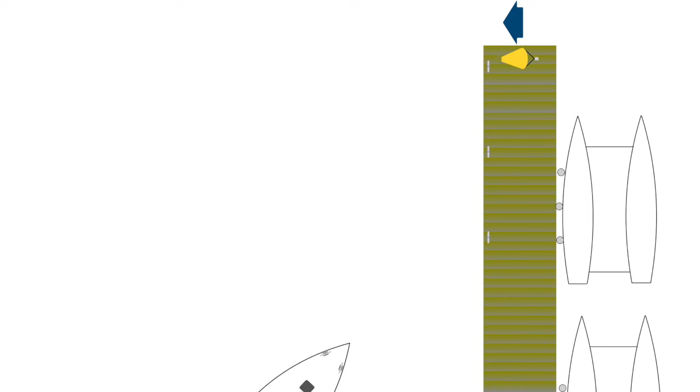So, the first rule of boating is that wind and tide are never helpful. Here you are coming ashore onto a pontoon where you have to moor with the wind and the tide pushing you off. Your approach is absolutely perfect, but if you don't do something quite quickly when you get there, then you know what's going to happen next.

What we need to do then is to make sure that we get a line or two ashore without delay once we're alongside the dock. The question is, which line is best? Some people like to get a bow line on first, and with a twin engine motorboat that can be arguable. Others prefer to get a stern line on first, and if you're single handing and don't want to leave the controls or the helm, that's also arguable.

What about the third option though, which is to rig a midline even if you're not planning to use it to moor later? A great cheat is to always imagine what's going to happen next if you fumble the next part of the job. So you can't get it in gear, your engine fails, or you fumble getting that other line on. What happens then? Well, let's look at what happens with the bow line.

The current and the wind push you off, and at very least you're going to struggle to get the other lines on, and if your cleats are further aft than I've drawn them here, you've also got a great risk of damaging the bow. With the stern line, things aren't much better. Again, you've got a risk of damage if the cleats aren't as close to the transom as I've drawn them here, and you'll certainly have more of a problem getting other lines ashore.

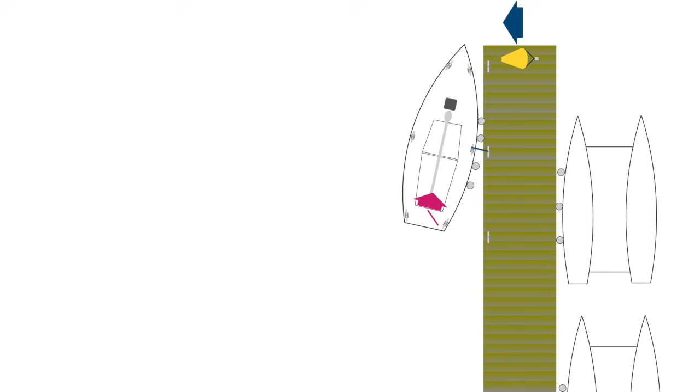So now it's really easy to put a bow line on. You could do it the other way around and go astern and bring the stern towards the dock. Then it's easy to put the transom line on.

Let's look at why. Again, we have our thrust line down the centre of the boat and we've got our rudder acting across the transom of the boat. But now, because they're a long way from that mid-cleat, what we'll find is that the turning moment created by the two of them is much greater. The boat's at its widest at the shrouds, where the mid-cleat is, and so there's a much bigger turning moment from the engine thrust because it's further away from where the line's attached.

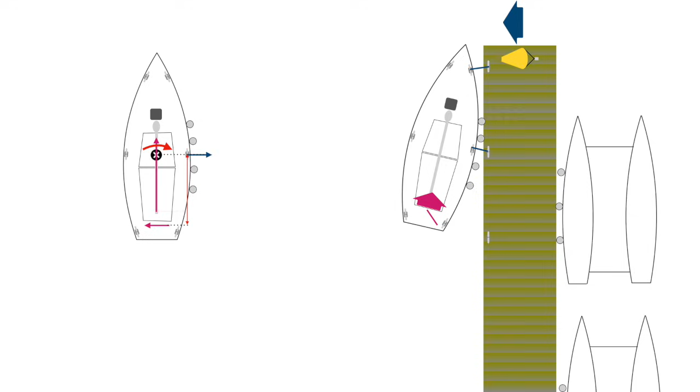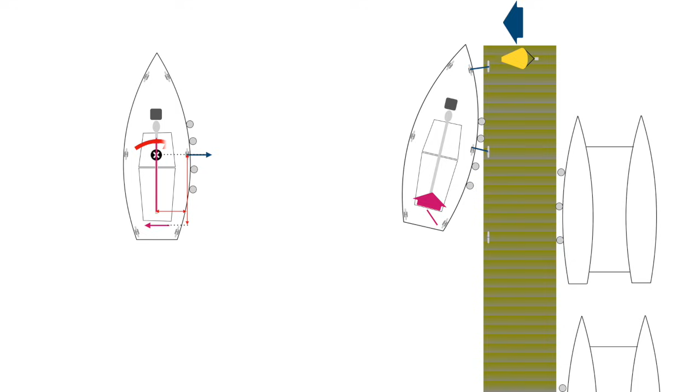Likewise, the rudder's a long way from the mid-cleat, so that gives you a big turning moment too. Combine these two and you have a very big turning moment created by the combination of engine thrust and rudder. At the same time, the wind and the current are acting around about the centre of the boat. They're almost exactly where the boat's attached, so they have little or no effect at all on the attitude of the boat. If they move slightly forward or slightly aft, the forces are still quite small. So it makes the boat easy to control.

What about modern boats with broad transoms? Yeah, they do break some of the rules some of the time. Kaniklani is the Sun Odyssey 349 and our berth doesn't suffer from a strong tide. So when the wind's moderate or up to moderate, I can put the stern line on, power against that, and because of the wide transom I can bring the centre of the boat in close to the dock and then put the other lines on. However, it is limited and it certainly wouldn't work in a strong current or a very strong wind.

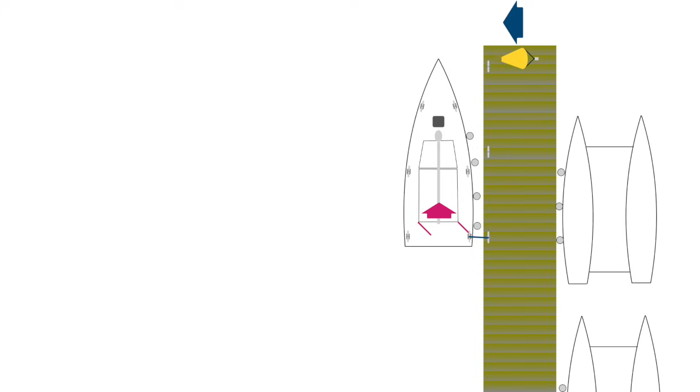Let's take a look at the forces then. We have the prop thrust down the centre line of the boat. Unfortunately, because of twin rudders, the sideways thrust from the rudders is non-existent because there's no prop wash, so we have to remove that.

So with no actual tidal current affecting the mooring, with that aft cleat tied on, the windage is still acting on the middle of the boat. Air's a lot less dense than water though, so the forces are smaller, but with that large distance you still get quite a moderate turning moment pushing the bow out to port. However, I've got about 1.75 metres of distance between the centre line and the cleat, and I can produce enough turning moment to overcome that with modest engine power.

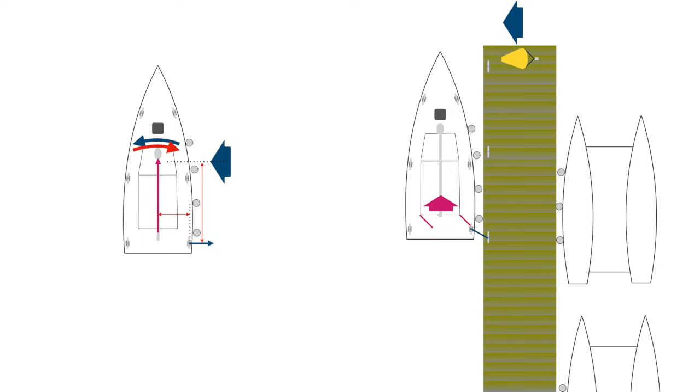If you're single-handing and don't want to leave the cockpit, there is a better way, and that's to rig a line from the cockpit through the mid-cleat and bring it back around outside everything and have it at the transom ready to put onto a cleat. We need to put a bowline in the end of this line and we need to make sure that it can't come off the mid-cleat, and to do that we pass it through the cleat rather than around it. So we take it through under the legs of the cleat, put a bowline on it, and then we attach it to a boat hook. To see how to do that, watch the boat hook bowline video on this channel.

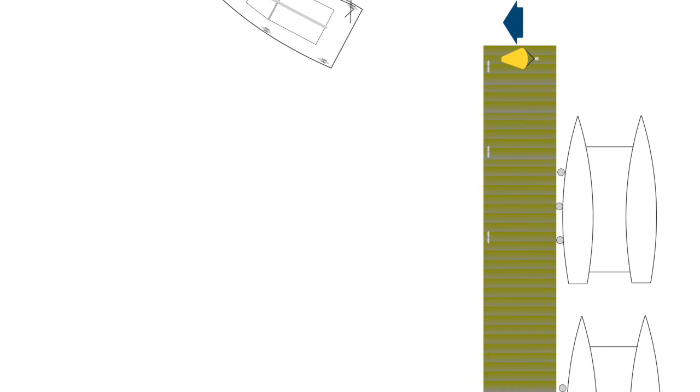To use this cheat, you'll need to allow time to rig the line through the cleat and attach a bowline to the boat hook before you get near the dock. Now all we do is come back towards the dock astern, ferry gliding if necessary across on the current, and put ourselves close to the cleat where the midline is going to be attached. Put the engine in neutral and then using the boat hook, place the bowline loop around the cleat. There's no rush to do this because the boat hook's quite long, so you have plenty of time.

Once you've done that, pull the boat hook out of the bowline and take up the slack before oxoing off on the aft cleat. To see how to do the oxo, check out our oxo video. Then power against it with idle power or a little bit above that and see what happens next. Because the boat's being pivoted at the centre cleat, you've got good control. All you now need to do is put the engine in reverse. Undo the oxo with the other hand and take up the slack as you move aft, then put the oxo back on that aft cleat, put it back into forward gear and pull forward again.

Once more you're pivoting on that middle cleat, and so the bow comes round further into the wind and into the current, pulls you back against the dock. Again into astern. When you go astern, undo the oxo with the other hand, take up the slack as you go aft, and then put the oxo back on again. This cheat allows you to get alongside single-handed in just about any boat, in just about any wind and current conditions.